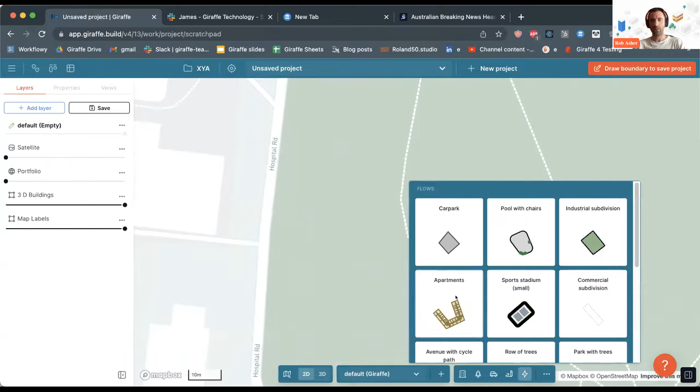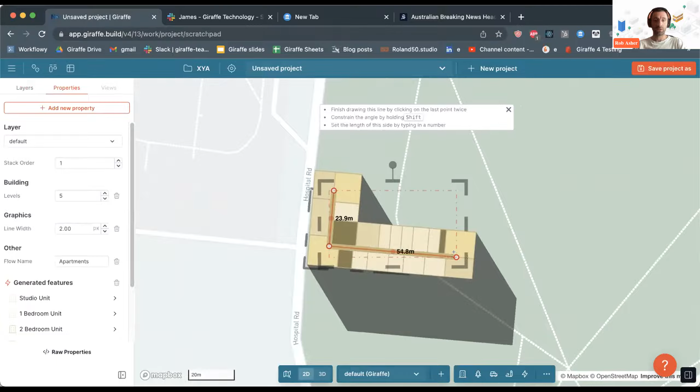So I'm going to start building a little scheme over here. You can see I just draw a simple line, and what Giraffe does is it creates an automatic apartment layout. As I stretch and pull this, what Giraffe's doing is the simple task of putting boxes that represent the apartments, so they're the right size and the right layouts, and we're breaking out the core, and I'm able to edit those and override the algorithm.

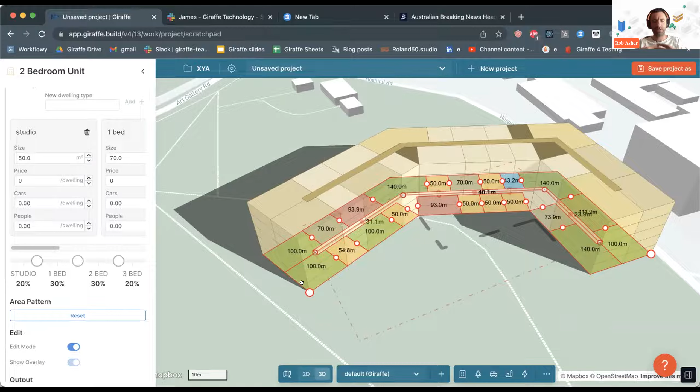So it's not a complex task that Giraffe's doing, but it's an incredibly time-consuming task, and it's difficult for a human brain to do well because you have to keep track of a lot of minute details.

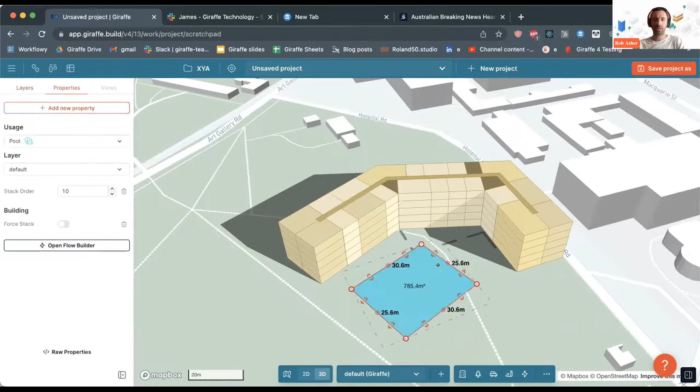I'm very excited about this feature, because it lowers the cognitive burden that the user has, because they're able to talk and to think. And whilst they're doing that, Giraffe is doing a lot in the background.

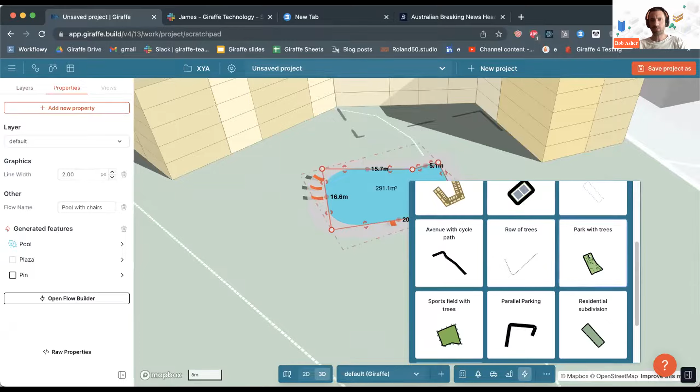And that lot, like this pool that I've just made with these little deck chairs, and let me put some trees around this, or let me build a park with some trees. That stuff Giraffe's doing, that detailed generative geometry, is helping to build clarity.

It may be building analytic clarity, as in we can now actually see this floor plan and understand how those apartments will be laid out, the kinds of views they have, the big ones on the exterior corners, the trees over here. So it's analytic, the numbers are of higher quality.

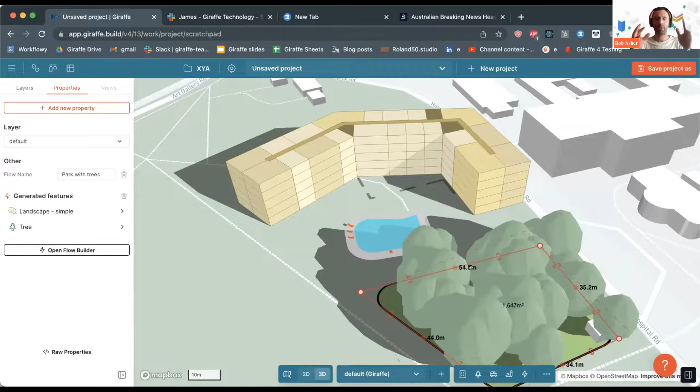But also the story you're able to tell and the communication you're able to have with stakeholders who may not be experts in apartment layouts, or may be struggling to visualize from a 2D plan what you're talking about in terms of shadows, or even the vibe of the place, the subjective experience you're trying to create.

That story becomes much richer and much simpler. So I think the generative functionality is going to serve both of those things again, that sort of mathematical brain and also that artistic brain.

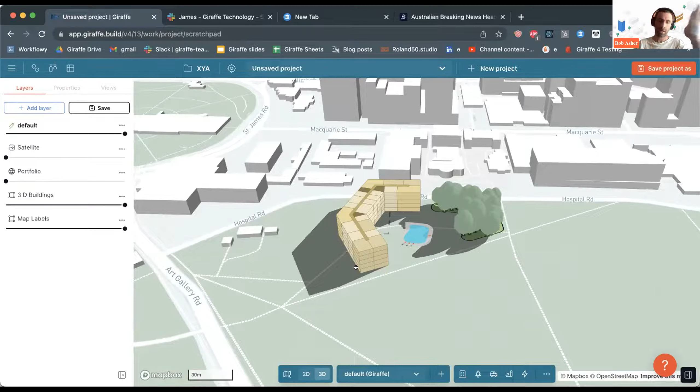And again, we've emphasized ease of use. You click on the lightning bolt, the lightning means fast, and you just draw. It's sort of as simple as that.

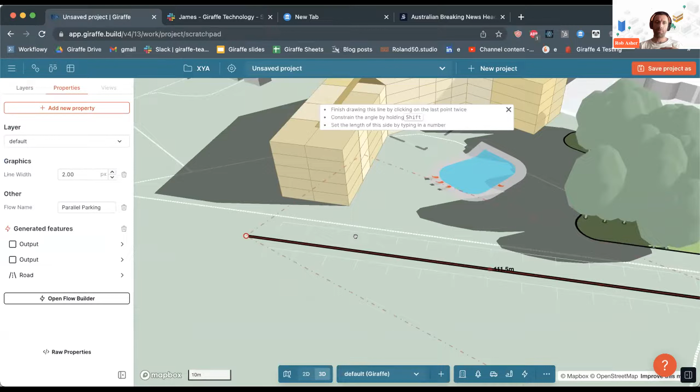So there's some parallel parking, which is not turning up too well, but hopefully you can see it. But under the hood, there's extreme power, and we can even open a familiar interface.

Some of you would have used Grasshopper, but some of the actual way the algorithms are constructed, you can get in there and, if you're keen, really understand them and customize them.

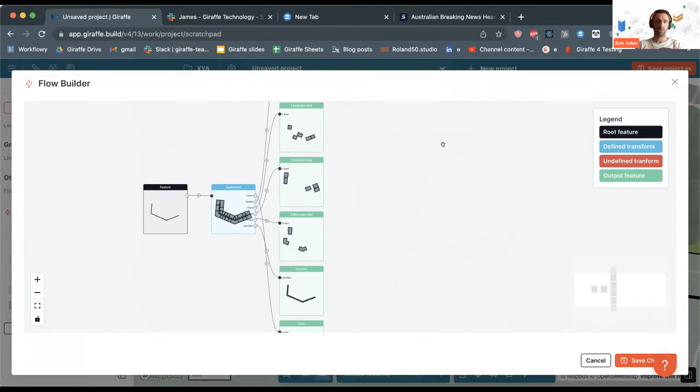But if you don't want to go to that level, generative is still going to massively accelerate your workflows. Like, this is hundreds of geometries on the screen, which you would have had to place manually. Now Giraffe has placed them for you.